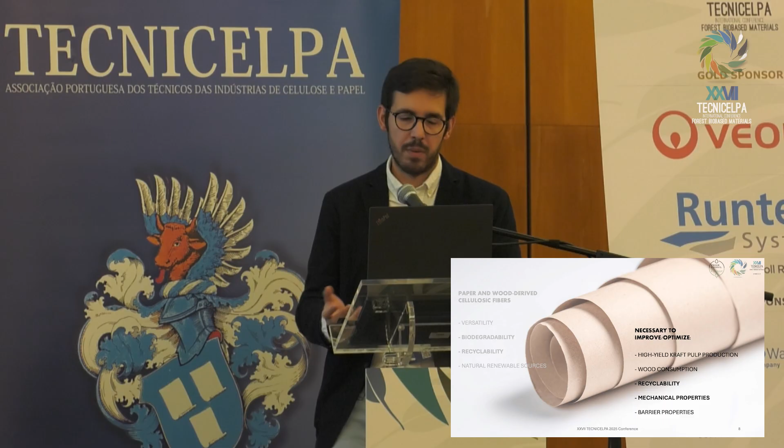As you know for sure, paper and cellulosic fibers derived from wood stand out as one of the most promising and interesting materials, mainly due to their biodegradability and recyclability. However, despite the packaging industry already moving towards the use of paper-based alternatives, the truth is that the challenges for the paper industry right now are still related with, for example, increasing the recyclability of paper-based products, and especially producing paper with better mechanical and barrier properties.

So as I mentioned, producing paper with better mechanical properties is the main goal of our agenda. Our work and our idea is to develop paper with enhanced mechanical properties such as burst, tear, and tensile strength, among others, to ultimately produce 100% paper-based packages in order to force the market and the industry to move from plastic to completely paper packages.

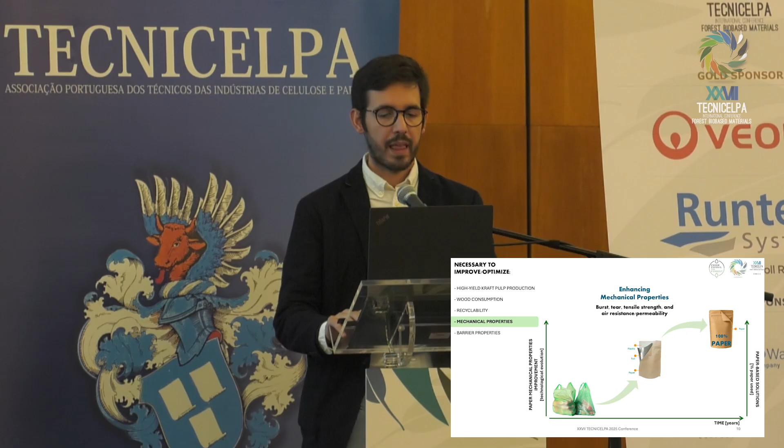So in our work, we have been using unbleached kraft pulp provided by the Navigator company. Our first step was to select different polymers, natural and synthetic, from a vast set of molecules belonging to different classes, but mainly polysaccharides and carboxylate polymers. For this selection, we used the biodegradability of the polymers, their non-toxicity, and their previous food contact approval as main selection criteria.

And then, when it was possible, we also included in our polymer testing list some variants of these pre-selected polymers that presented different physical-chemical characteristics, such as different surface charges, or structural modifications, such as different functional groups that we consider to be relevant for the interaction with the cellulose fibers.

These polymers that we selected were used as wet end strength additives, and before we evaluated their performance on enhancing or not the mechanical properties of the paper, we performed some preliminary experiments to understand how to prepare and how to handle these polymers, to identify the most suitable point to add these additives to our paper furnish, and then, of course, to determine the best concentration range to use.

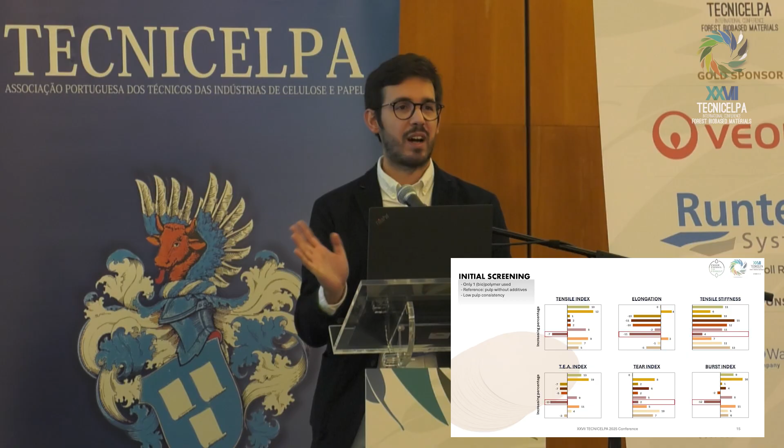So we were very surprised to see that from our selection, only one of the polymers was unable to lead to increases in the mechanical properties of the handsheets. So our pre-selection, our criteria, was quite successful.

But then we wanted to further investigate and explore the use of these polymers. So we took two of the most promising polymers from the round before, and we explored different concentrations of each one of the polymers. And we also explored the pulp consistency. So these additives, these polymers, were in contact with the paper furnish at different concentration points, let's say.

And what we observed was that for both polymers, increasing the polymer concentration and also having the polymers in contact with more concentrated pulp, so pulp with higher consistency, led to higher and significant increases in the mechanical properties. And for us, a significant increase would be something higher than 5%.

So then we wanted to explore how the charge of our polymers would be an important aspect to have in mind when using these polymers as wet-end additives. So we used three very similar polymers in their structure, but presenting different surface charges. One was positively charged, another was negatively charged, and we used one amphoteric.

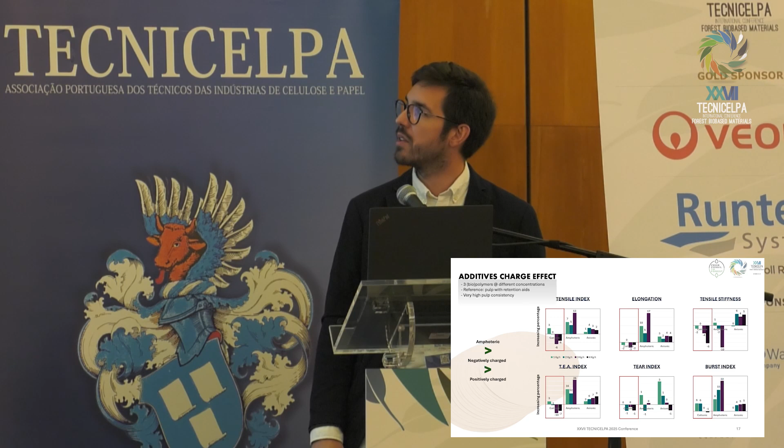Then we took again the two most promising polymers from our selection, and we evaluated the combined use of these polymers with standard retention aids. And what we concluded from this experiment was that when we have both types of additives in our formulation, we were able to overcome some of the negative effects commonly associated with the retention aids. However, for the tear index, we couldn't see any improvements.

And then, what was our most challenging, but also the most important experiment, we tried to combine two different polymers and see if, having only these two additives in our formulations without any other type of agents, we could see even higher changes in the mechanical properties of our handsheets.

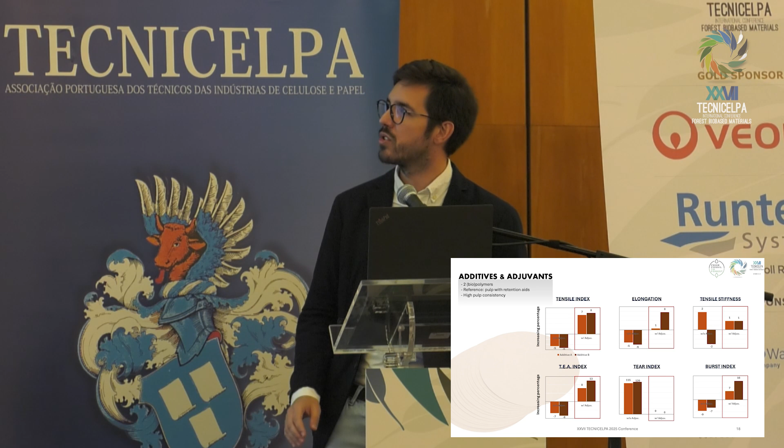And we did see a better performance when we have two polymers, even when we used non-optimized and very low concentrations of these polymers. And these are the first two bars of these plots. But we were very surprised when we saw that when we optimized the ratio of these two polymers, we were able to obtain very high improvements in all mechanical properties, and especially we were able to obtain a 15% increase in the tear index, and at the same time an increase of over 40% in the burst index, which for us was extremely important.

So just to give you a final and quick overview of our data, if we consider the CEPI guidelines and criteria for the definition of the different paper grades, and if we look at our most promising paper formulation, we saw that with our strategy of using natural polymers to improve the mechanical properties of the paper, we were able to not only meet but also surpass the minimum requirements to produce paper belonging to the brown kraft liner and the brown test liner grades, which is good for the packaging sector.

So finally, my last message to you all is that the answer to stop the excessive fossil plastic consumption can rely entirely on nature, from the cellulose fibers to produce the paper to the biopolymers that we can use to produce paper with enhanced mechanical properties that can be used to produce new eco-friendly packaging solutions.

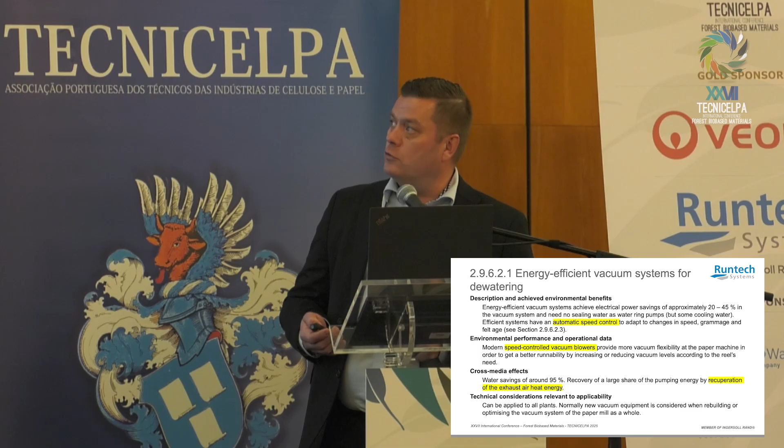Why should we talk about these speed-controlled turbo blowers and vacuum sources? One reason is, of course, that this is very rarely known, but the European Union is regulating this technology, and one of the requests for the new paper mills, paper sites, is that they need to use this kind of best available technology. And the speed-controlled turbo blower is proven to be one of those. So this is something that is good to keep in mind when designing the new sites and the major rebuilds.

What we can gain with these speed-controlled machines is energy savings of normally from 25-30% up to 70%, depending on how much we are integrating and optimizing the system. We are not using water. These are dry systems, so this is one huge benefit, especially for areas where you have limited water sources. Due to lower energy usage, of course, lower CO2 emissions and a smaller carbon footprint are achieved as well.

Variable speed and capacity, quick optimization without needing bleed air, and minimal throttling and expansion losses. In some cases the whole vacuum system can be built with one big blower, but these sometimes end up in a situation where we are creating expansion losses when mixing high vacuums and low vacuums together. That's why our approach of having several blowers with different vacuum levels and adjustable capacity is much better from that point of view.

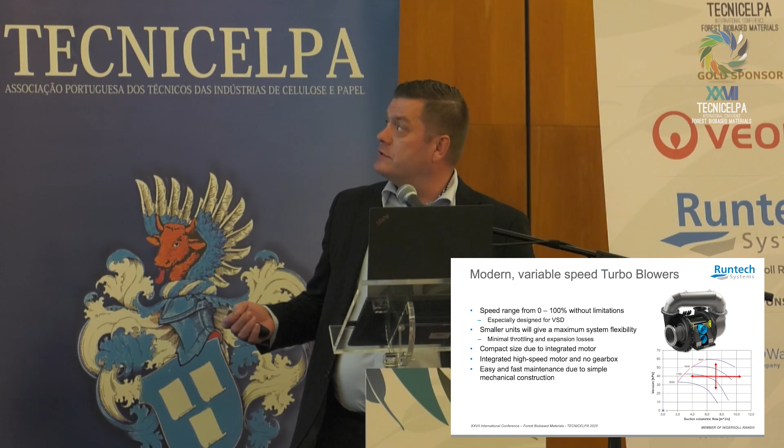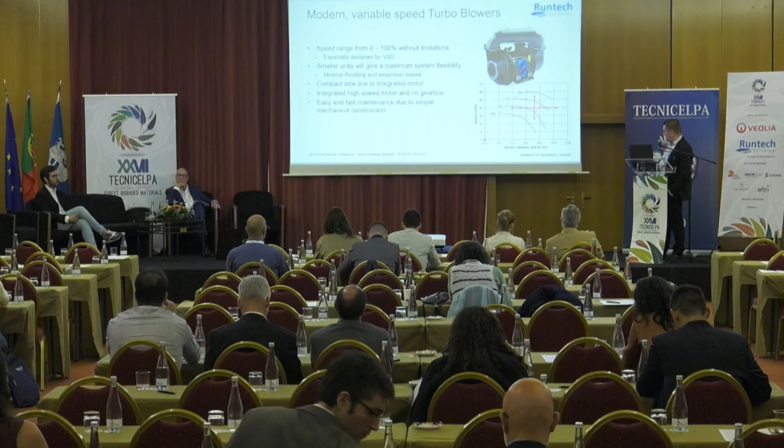Maintenance is that way very simple, as the mechanical construction is very simple. There is only one rotating shaft and two bearings. Here we can see that when we design the blower correctly into the system, we're supposed to be more or less in the middle of the operating range. That way we can go up with the rotation speed and have higher vacuum levels, or go down to have a lower one. And also in the flow direction, we have flexibility in both directions. And this flexibility is really, really important when we are talking about optimization of the system.

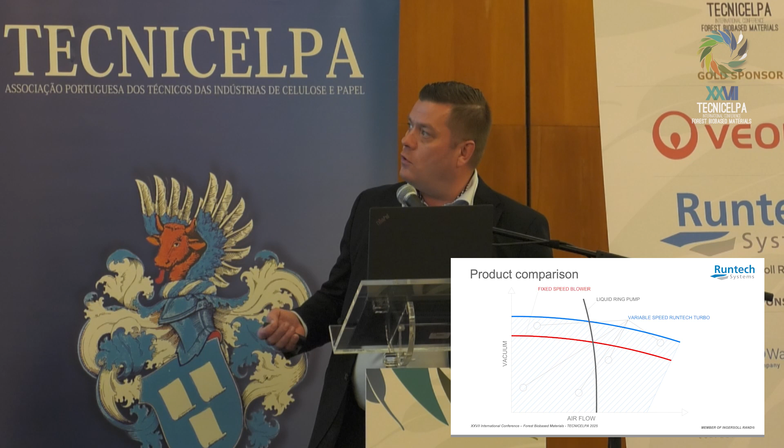This is showing the difference when we are comparing different vacuum sources. So we have here a fixed speed blower, then we have a variable speed blower, and then we have a liquid ring pump. So airflow on the x-axis and vacuum on the y-axis. The liquid ring pump is a fixed flow pump, so the flow is always more or less the same. And according to what the restriction is at the end of the pipe, ceramics, felt, wire, what kind of paper pulp is used, it affects how much vacuum is created in the system.

The blower is totally different. It has almost the same vacuum level all the time if we are rotating at the same speed. But then according to the flow or restriction, the flow can vary a lot along this curve. And if we have a variable speed blower, then we can basically have as many of these curves as we want. Every single RPM is an independent curve, which means that we can operate on this whole area. It is not a curve anymore, but an area.

And this gives lots of benefits when it comes to flexibility in capacity, and also adaptation to the different operational points that come from different production and the different age of the felts and wire and so on.

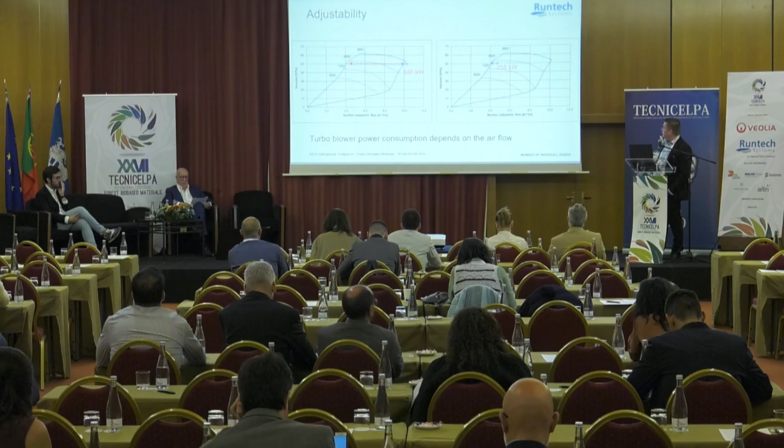This is also one thing that is good to keep in mind: when we have a new paper machine specification, very often these specifications are overdimensioned a little bit. There is always extra capacity for every single stage, and this means it can be very challenging from the device point of view if the specification is very high, but in the end the operational point is very different. With our systems, this is not such a big problem when we have several smaller units and full flexibility in the area where we can operate.

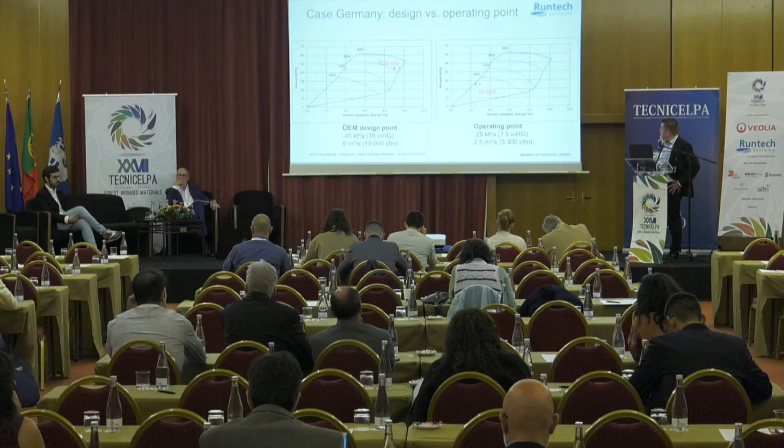So this is, for example, one specification from a machine builder, where the original specification was -45 and 9 cubic meters per second. This goes basically hand in hand with a single or 1.5 size tissue machine. In the end, the operational point was 25 kilopascals and only 2.5 cubic meters per second. So we came down quite a lot with the kilopascals, and also a huge drop in the flow. But no problem with the blower. The blower adapted to this very easily. We didn't have to do any mechanical movement or changes, just the settings in the DCS.

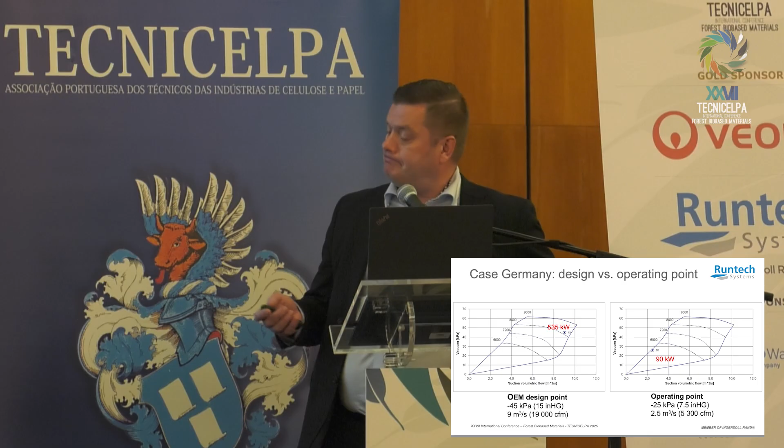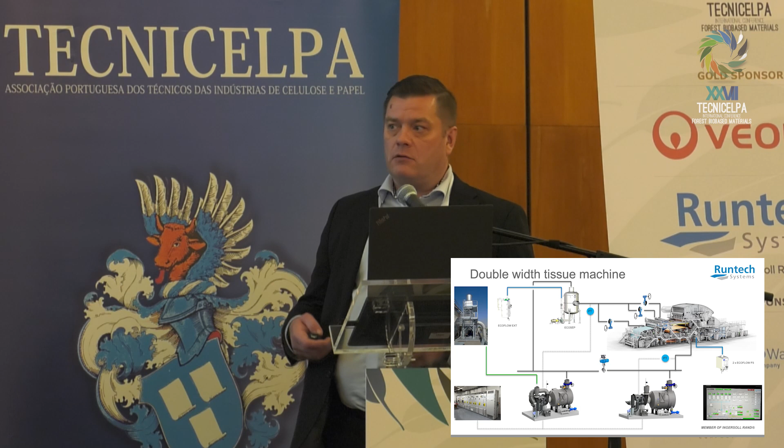More and more important is also that when we are doing compression at the blower, we are creating hot air in the exhaust. And this hot air is more and more utilized in the drying hood, in heat recovery systems, and so on. That way we can get all the energy recovered from the vacuum system. And this is also integrating the vacuum system more and more into the other parts of the machine.

Press section dewatering and also wire section dewatering are a very important part of the vacuum system. And the press section is maybe easier to understand and explain, let's say.

The purpose of the press section is purely about the dewatering. It's about taking the water out from the web. So why don't we measure all of this water? And according to this dewatering information, we can then adjust the vacuum that is needed in each position.

And I think that this is one of the key ideas of this adjustable vacuum system, that we need to have information on how we are adjusting the blower. We need to get that information from the process, reliable information, so that when we are making the adjustment for the vacuum, we can immediately see from the dewatering measurements what is going on. Was the adjustment good for the process, for the dewatering, or was it bad?

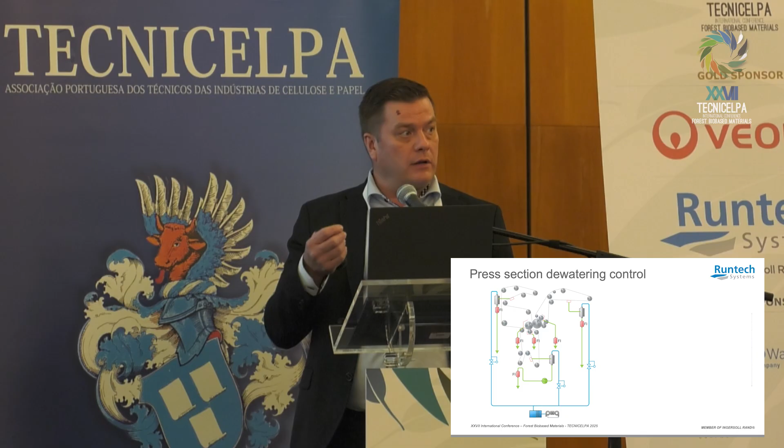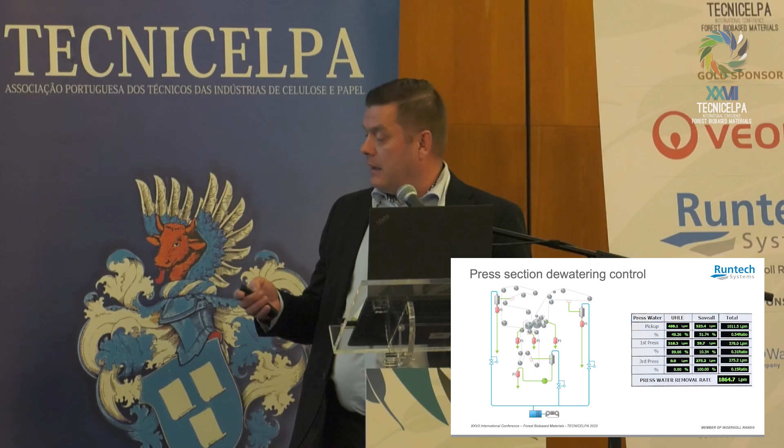Then in a DCS, we can put everything into the table, every single position, and then have of course the total of the dewatering from the press section. And whatever changes or movement we are making in the process, it's affecting this value. If it was a positive change, this is going up. If it was negative, then this is going down. And this is a good tool for justifying the adjustments on a paper machine.

When we are connecting several positions together with one blower, we are creating a kind of throttling system in the pipeline. And this system works so that whichever of these single positions, it can be a Uhle box, flat box, roll, couch roll, press section roll, whatsoever, is having the highest set point, this is working as a master for the blower speed.

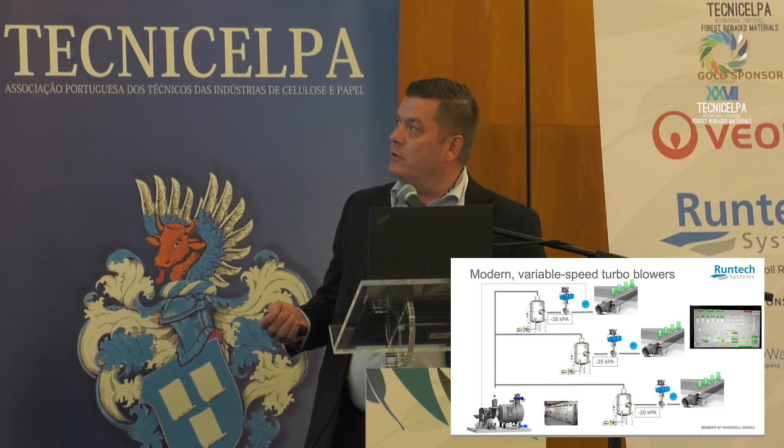And the blower is speeding up to create this maximum vacuum level. Of course, this control valve is then forced to 100. And then all the other branches into the blower are working as independent control loops with a throttling valve. And this way we can mix different vacuum levels and operate with only one blower.

What is the future, or actually it's not future anymore, it's today's technology, is active magnetic bearing technology, and this is coming very heavily into our business. The main purpose, of course, is that we are trying to minimize the maintenance that we are doing for the blowers, and this active magnetic bearing is very good that way, because basically we don't have any mechanical contact in the bearings anymore, and there is nothing that can wear out.

There are, of course, safety bearings if something happens to the magnetic field or power, so that there is a mechanical backup, and this is maybe something that we need to change every now and then, but otherwise this is increasing the maintenance interval quite a lot. Things like dirt build-up are remaining, of course, the same, because the blower itself doesn't change. Only the bearing is changing.

Another thing that we have started to use nowadays is open impellers. There we can see that the impeller is no longer a closed one, like in some process pumps, but it has open wing plates. And this is beneficial when it comes to the build-up of dirt in the impeller. So there is less area where the build-up can stick. And this kind of impeller is also much easier to clean. So when we are doing the maintenance, cleaning the impeller is much easier.

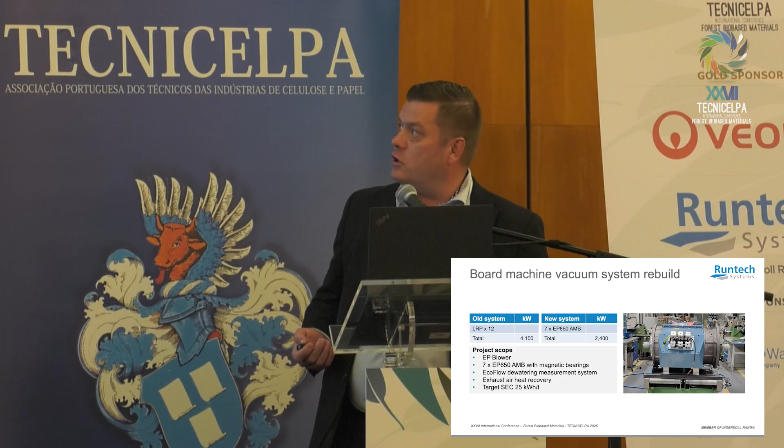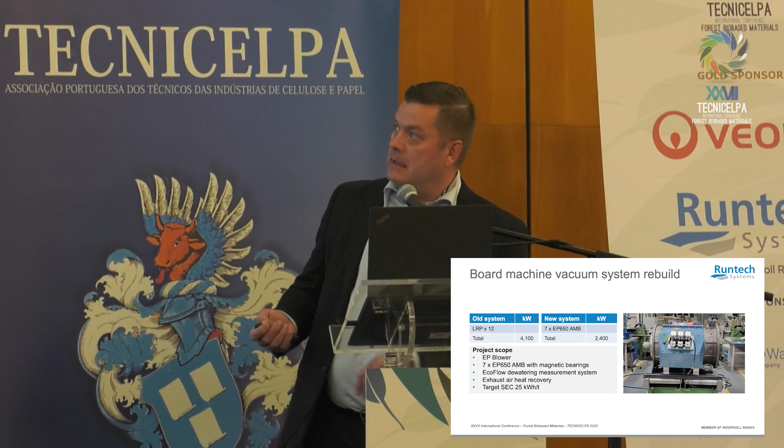Right now we have two places running with this, one tissue machine in Turkey that has been running already 3 years there without any problems. We are also rebuilding one liner machine in Germany, where we are replacing 12 liquid ring pumps with 7 turbo blowers, and the major force for this is energy saving, but also maintenance savings.